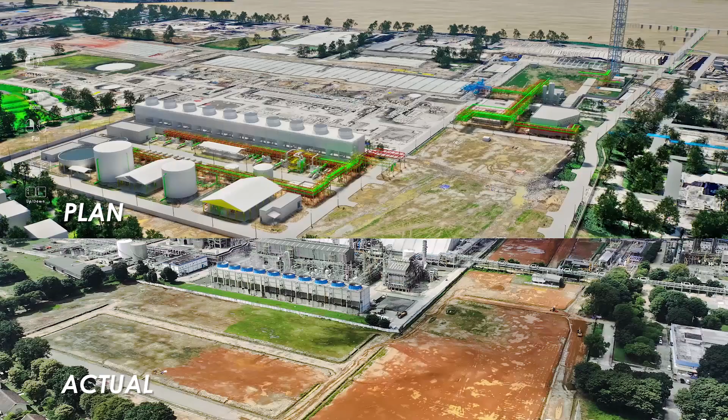Adhi Karya Company, through the Energy and Industrial Department, collaborated with Wuhuan Engineering Company in building the Pusri 3B project at Pupuk Sriwijaya, Palembang, which will start in 2023.

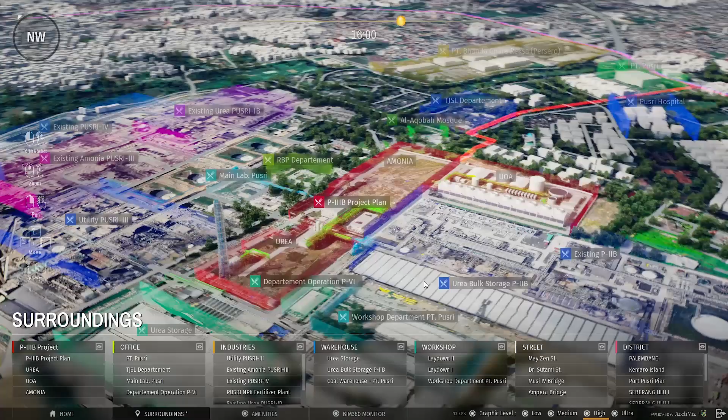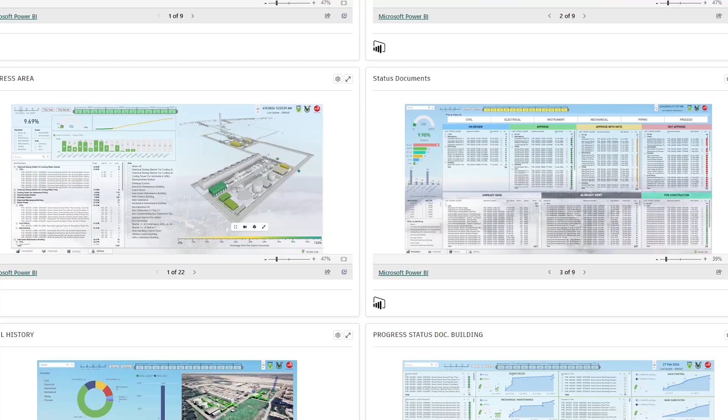This factory will produce ammonia fertilizer with a capacity of 1,350 mtpd and urea 2,750 mtpd, which will operate in Palembang, South Sumatra. The Pusri 3B project implemented real-time monitoring documents from Autodesk Construction Cloud, with more than 20,000 documents.

These documents will be submitted to Autodesk Construction Cloud, consisting of drawings, technical specifications, datasheets, calculations, study reports, MTO or BOQ, letters, IOM, etc. Of all documents submitted in BIM 360, the data will be recorded and can be easily extracted.

From the data extraction schedule, business intelligence tools or Power BI can read the extraction data directly with Autodesk Construction Cloud, with data extraction results providing detailed information, giving flexibility to process and create data visualizations on business intelligence tools.

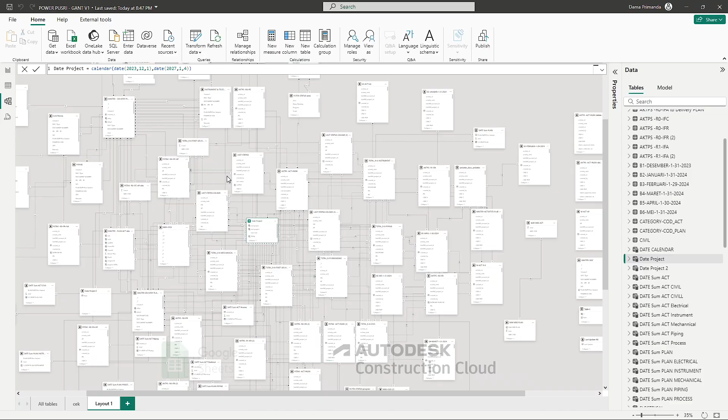The results of dashboards created on the business intelligence tool can be published and shared with specific users on Insight BIM 360 Autodesk Construction Cloud.

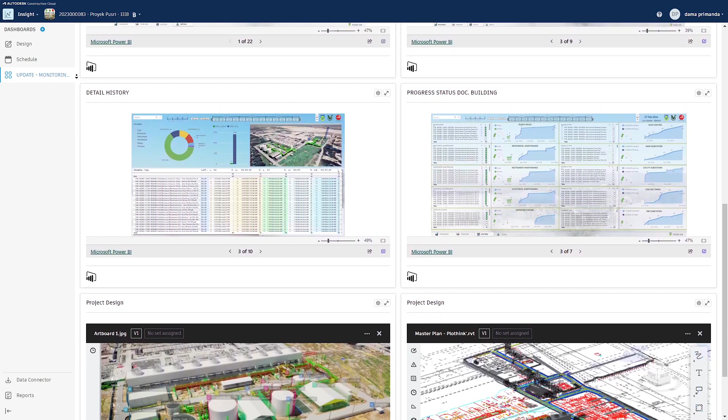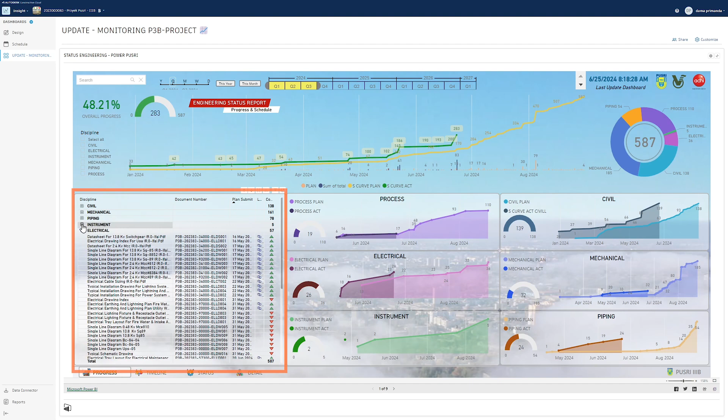Starting with the Progress dashboard, here all team members can see overall progress with actual and planned submission documents, disciplinary progress, and a table of documents with easy access links to view the document.

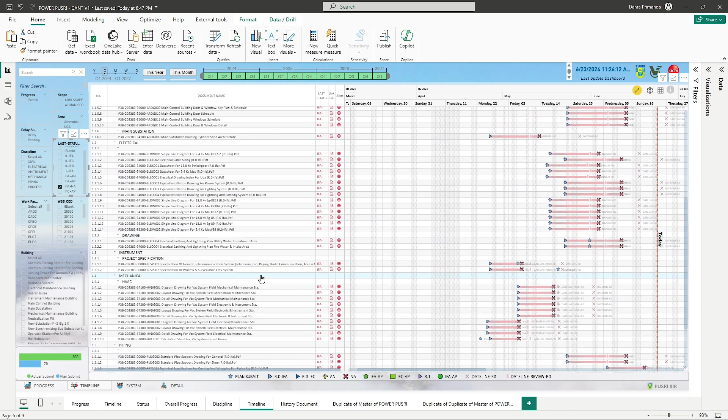On the Timeline dashboard, users can track document milestones, find out the status of the document over time, see the first delivery point, see the last status of the document, use easy access document preview links, and apply advanced filters to search specific documents.

On the document status dashboard, users can see status updates for all documents that have been sent, as well as the status of pending and overdue documents. They can filter by discipline or more filters, and view documents with document links.

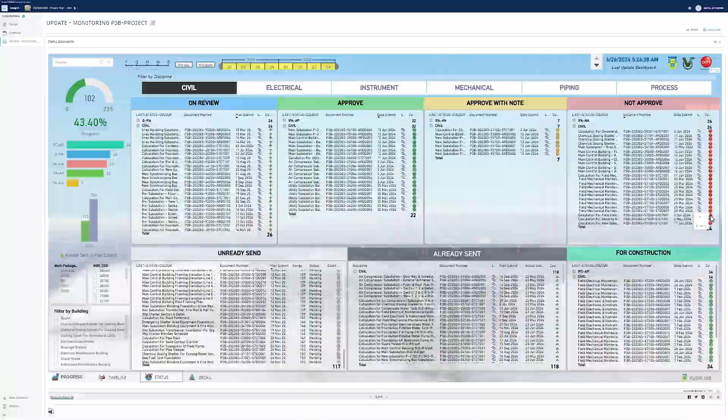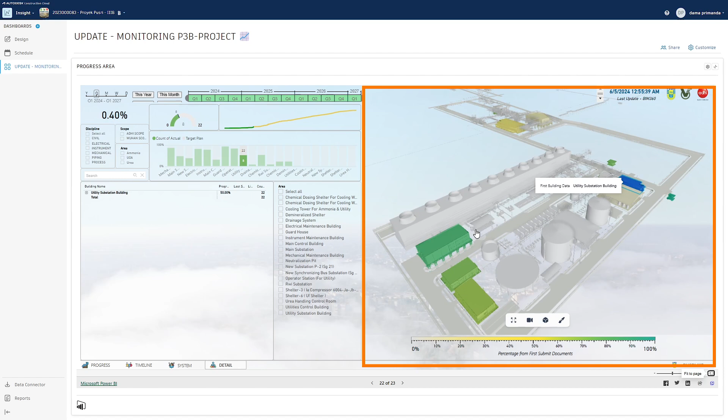On the progress area dashboard, users can see the percentage of document submission from each building, with color range indicators ranging from 0 to 100%. From here, users can find out the progress of the location of each building along with the document requirements, as well as detailed document status with links to preview documents.

To ensure that the data is automatically updated in real time, the business intelligence tool can customize a refresh schedule at any time to automatically import data from BIM 360 into the dashboard.

It would be great if real-time data monitoring could be combined with real-time rendering. The interactive visualization becomes more powerful with real-time information of delivery and status documents from Autodesk Construction Cloud.

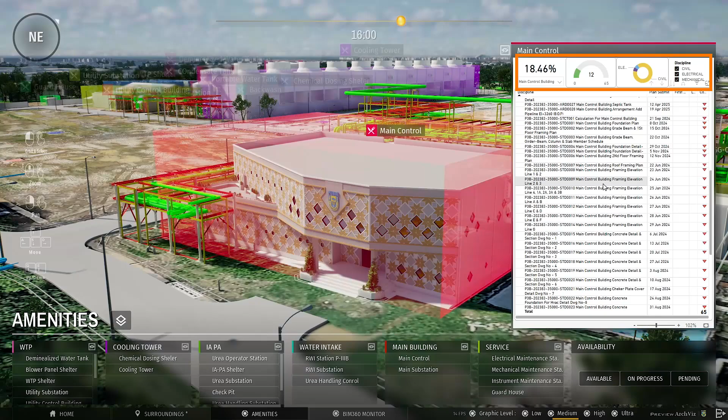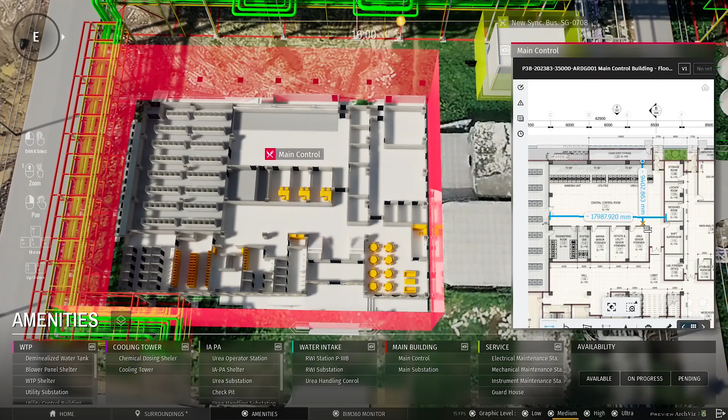On the information screen, users can see the status of the document with progress and details from a selected building, with easy access links to view the document, and still get an overview with powerful features from BIM 360 document preview, navigating detailed drawing document previews along with real-time 3D rendering visualizations.

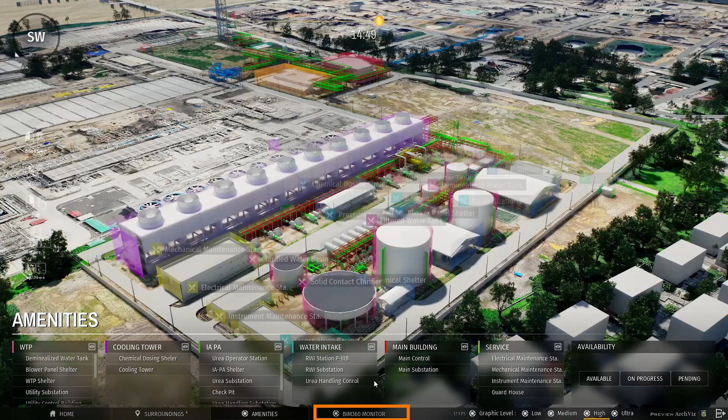The interactive visualization can open the monitoring in real time, starting with overall progress for actual and planned submission of documents, the Discipline Progress Dashboard, Timeline Document Dashboard, Document Status Dashboard, all with links to view documents from BIM 360.

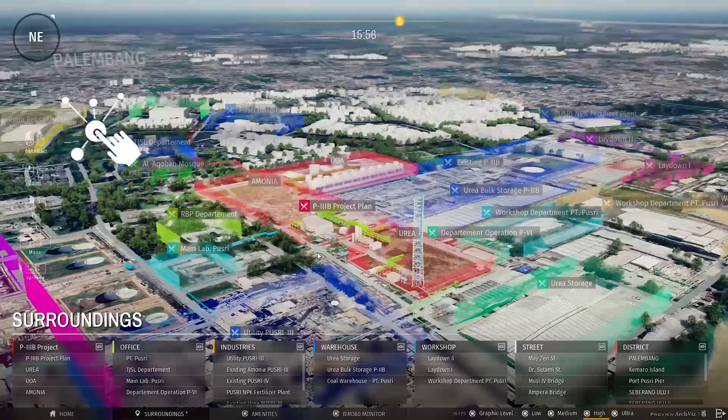With Autodesk Construction Cloud and interactive data visualization, it provides faster and deeper information and analysis to understand the construction plan more effectively, and delivery of documents more easily, with automatic recording of delivery document data.

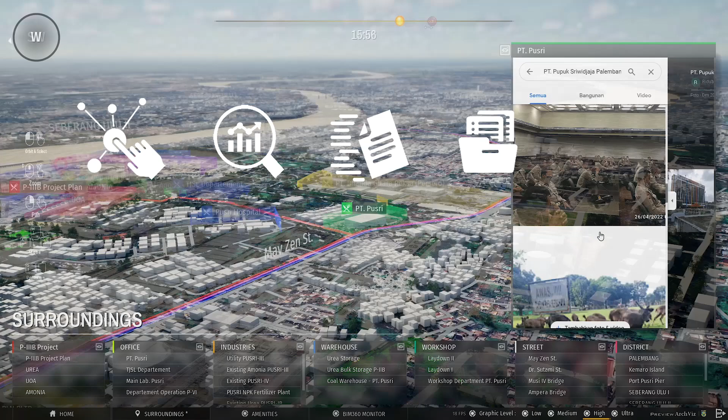No more manual recording. Paperless, improved productivity, faster approval process, easier access, the best system of document management with real-time project insights. That is the power of the Pusri IIIB project with cloud-based solutions for large-scale projects.

And everything is real-time for the next level of data visualization.